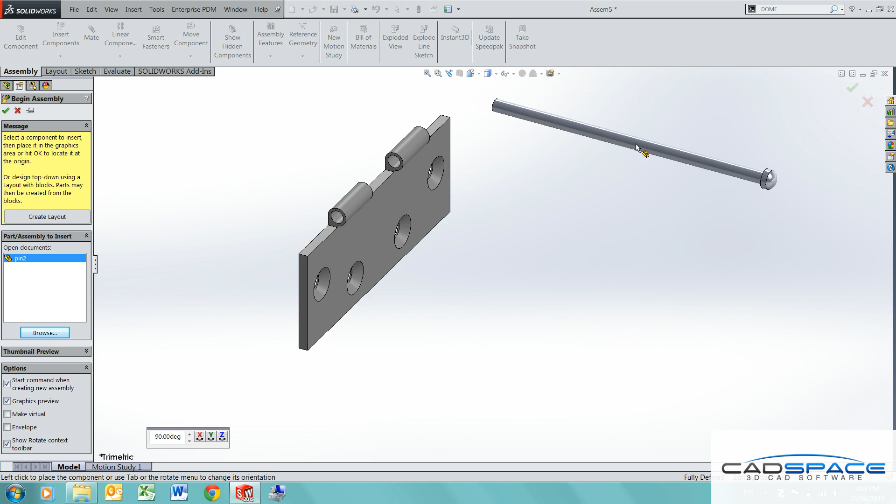So I'm going to create an assembly with a hinge and a pin here. This is the same hinge and pin that you'll find in the advanced tutorial in the SolidWorks tutorials. I'm going to put the other side of the hinge here, and change this one to the outer cuts and hit OK. Just a different configuration, a quick way of changing it.

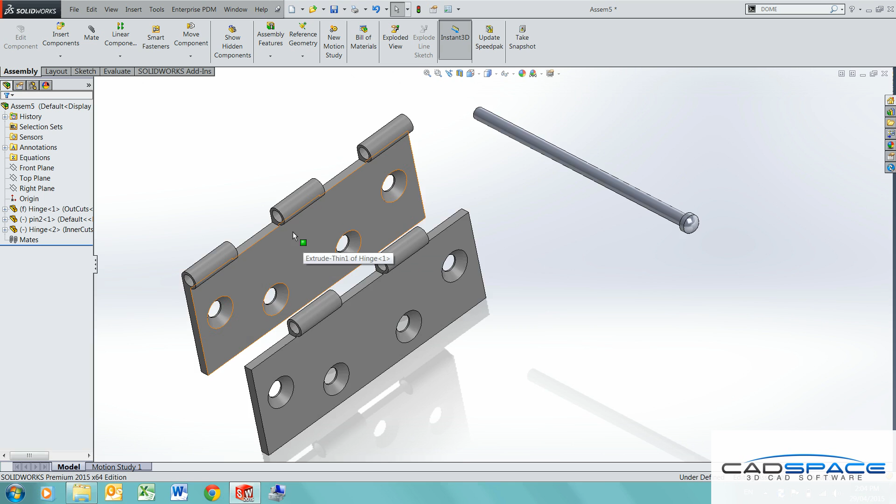Now I want to make sure this is in the middle here but spread evenly. The quick way of doing that is if you select these inner faces, holding control to keep selecting other faces, and in this order select the outer faces. So I've got 4 faces selected, and if I just hit mate, it'll automatically create a width mate. We'll hit OK, so now I know it's in the dead center.

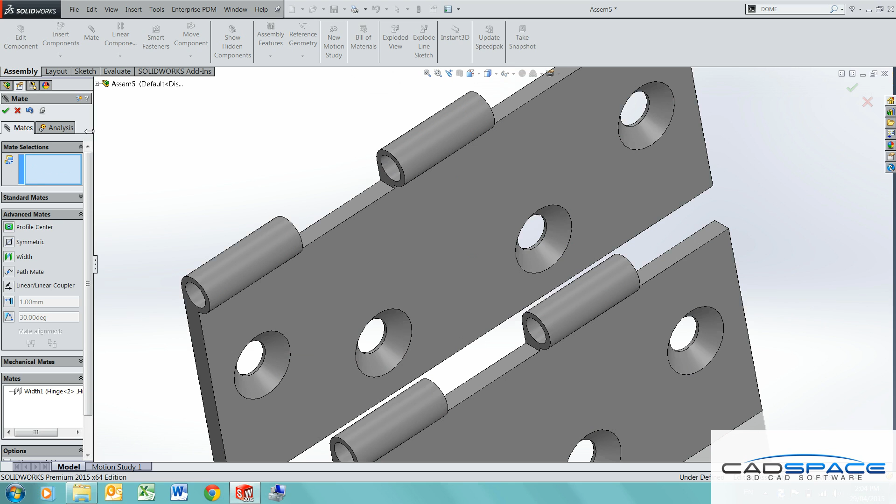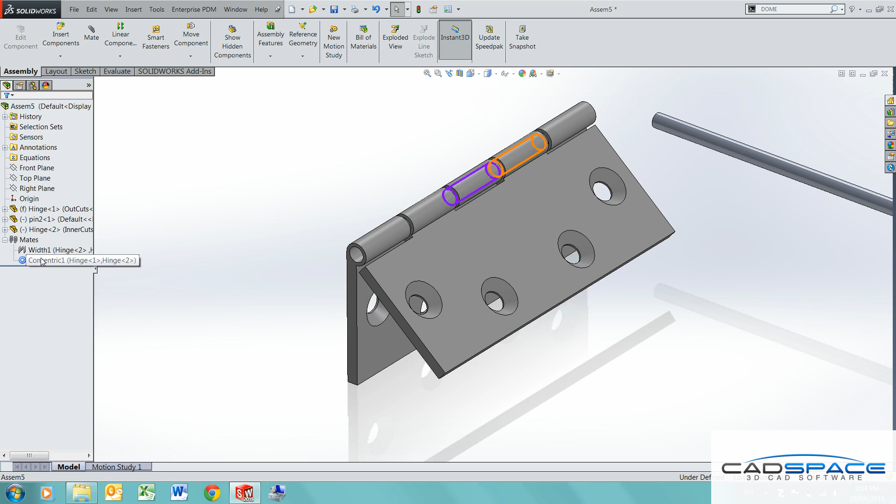The last thing I'm going to do is create a concentric mate with this cylindrical face here and this cylindrical face here, and hit OK, then OK again. Now you can see it's actually overlapping itself here. So what I need to do is reverse one of these concentric mates, because these countersinks are not facing into each other. If I expand my mates, right click on it and say flip mate alignment, now you can see it's exactly how we want it.

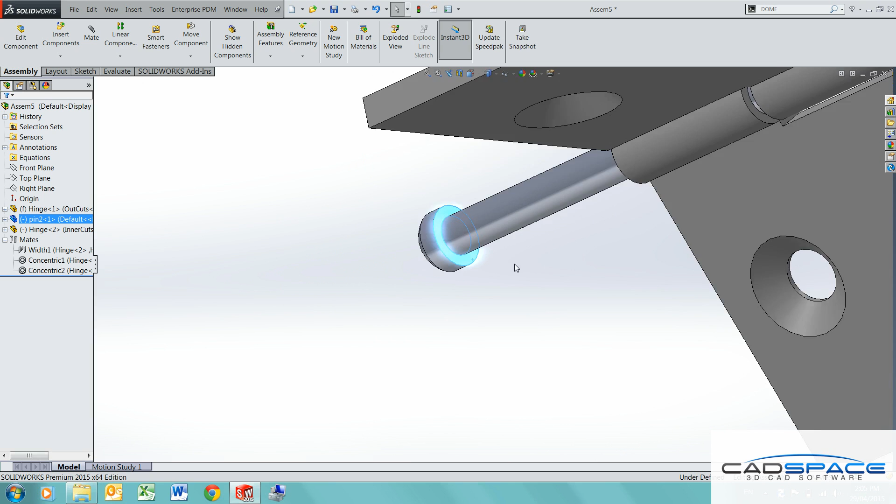Now quickly put that pin in here, concentric this to this face. You can see what I did there is I selected the circular face and the circular face inside, and it gave me a quick option. I'm going to do the same thing here, select this face and control select this face, and it'll give me a quick shortcut so I don't have to go to my mates feature, just hit coincident, and it works the same way. You can see it adding it over here. So now this works as we want it to.

What we really want to find out is create a mate that doesn't let me do this. You can see it's overlapping here. So what I want to do is just get it back to somewhere here.

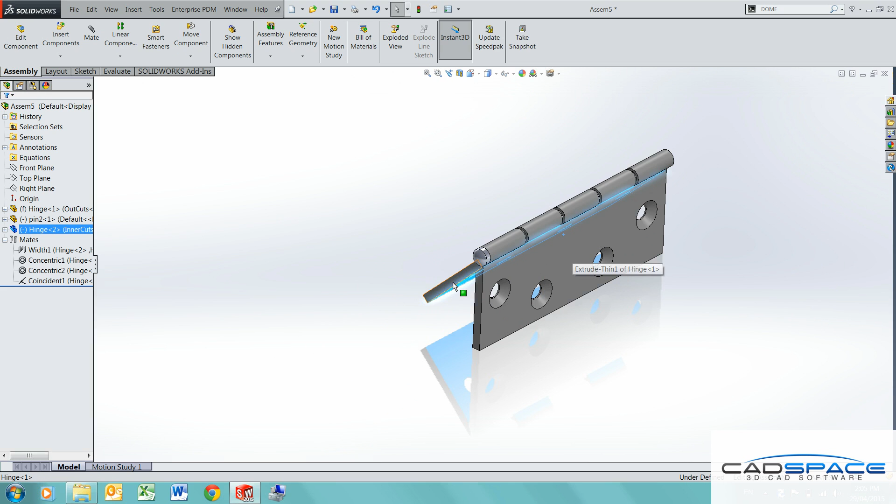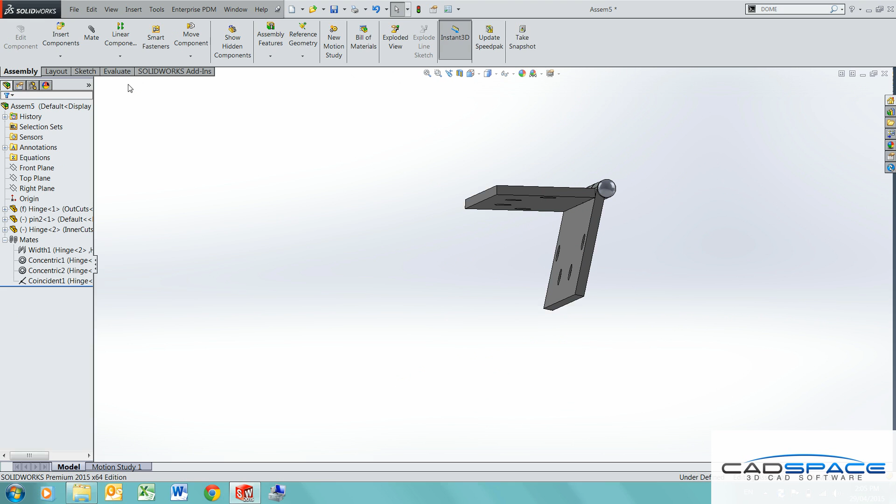I want to do a quick collision test to find out what the actual range of motion is. So just hit move, select collision detection, and move this down. That'll be flush, we were expecting that. So if I go the other way, keep going, that's where it stops when these two faces hit. So we hit OK, and I want to quickly measure that.

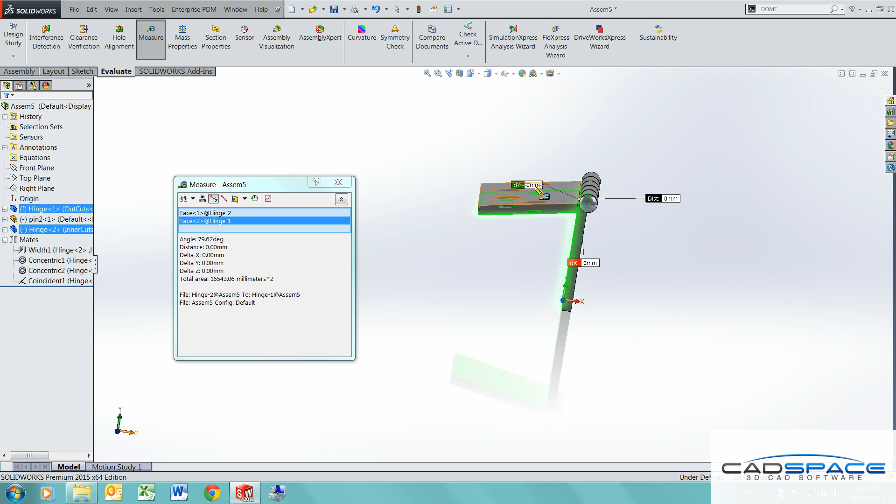From this face to this face here, we've got an angle of 79.62, so about 80 degrees. So what that means is when these two faces are touching here, that's 0, goes around, and up here that's 180 plus another 80, which is about 260. So I'm going to try and limit my angle mate to about 250 degrees so I know it won't hit, and I'll have good range of motion there.

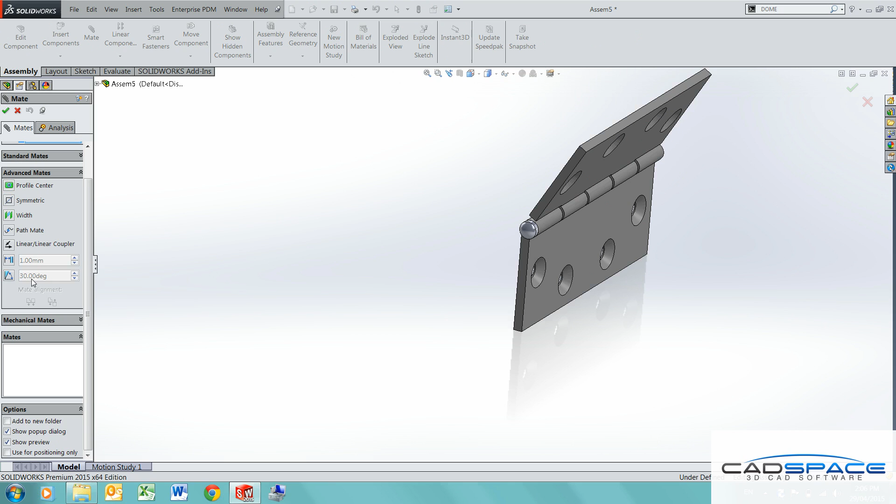So let's close this, put that back somewhere over here, and I'm going to go to my mates feature, mate selection, but this time instead of creating a standard mate, I'm going to go to advanced mate, and there's an angle limit mate. The first thing I need to do is select my faces to create that limit angle mate. Select these two and click on angle.

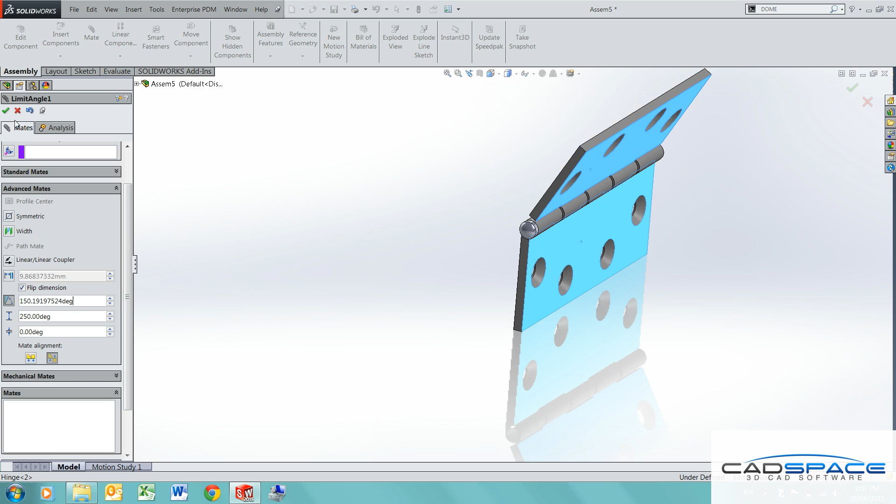Now to explain these 3 little boxes here, the first one's the actual angle that it's at, the second one is the maximum angle it can be, and the third one is the minimum value. So the minimum value is actually 0, the maximum value, as we said, is 250. The angle itself doesn't really matter, you can just leave it here. So if we hit OK and OK again, we try and move this and it stopped, we move it the other way and it stopped there, even if I try and move it down. Okay, so that's how we set up the angle limit mate.

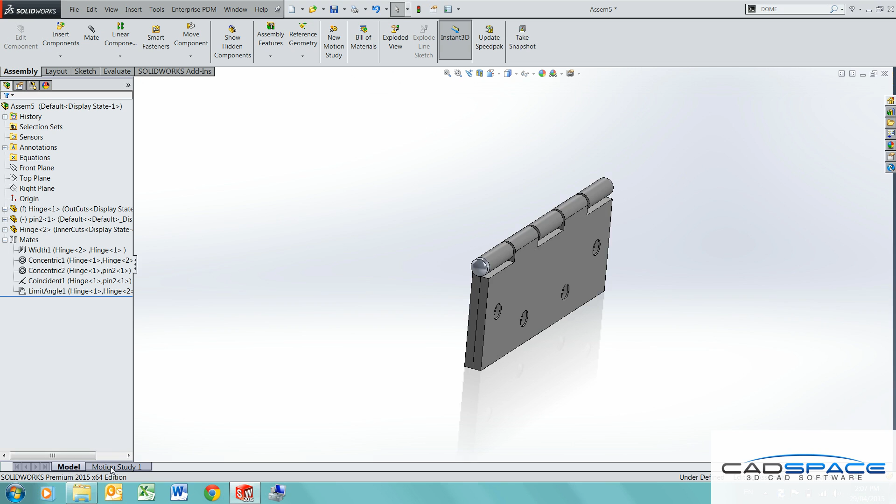Now if I quickly want to animate this, I'll move it over here, go to my motion study, make sure we're at 0. So in 2 seconds I want it to move up about there, and after 4 seconds click on the timeline and move it all the way to the end, and you see it's automatically populating and moving things.

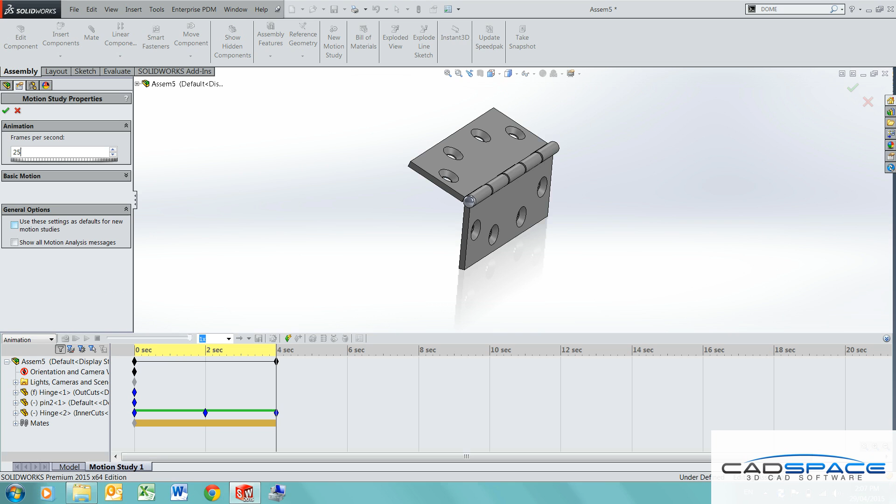So if I go to select the start here by clicking here, hit calculate, you can see it's a bit jagged, a bit jumpy, so I'm going to go to my options and make sure the frames per second is a little bit higher, say 25, nice and smooth, and hit calculate. And you can see that's a lot smoother there.

Okay, and that's how we animate it, and that's how we create the limit mate.